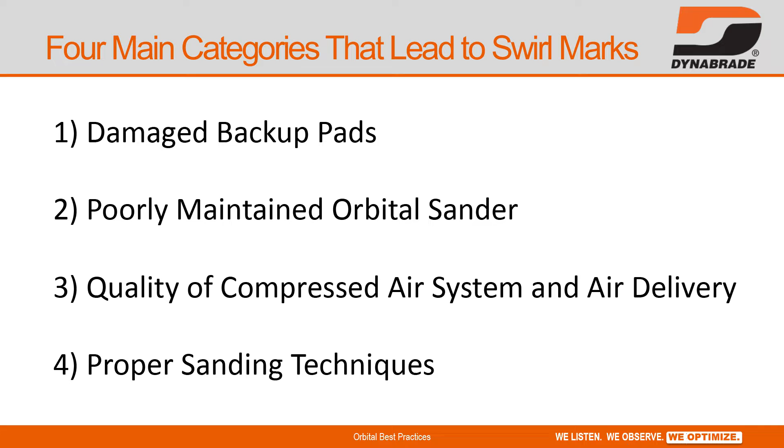Let's start out by talking about backup pads. Oftentimes, backup pads are overlooked as a potential problem when an operator runs into these unwanted swirl marks. However, it's usually one of the common causes.

There is a direct correlation between the backup pad and the finished product. Let's look at taking a backup pad off an orbital sander.

With Dynabrade, it's real easy. All we're going to need is one 26mm wrench. We're going to fit that wrench in between the bottom of the housing and the backup pad.

It will rest on a flat. We'll then turn the pad in a counterclockwise motion, and it will unthread from the tool. Just like that, our backup pad is off the orbital.

When speaking to pad failure, there are two common problems that take place. Number one is the foam breaking apart, and number two is the abrasive stops sticking to the backup pad. When the foam comes apart, it is called a cohesive foam failure.

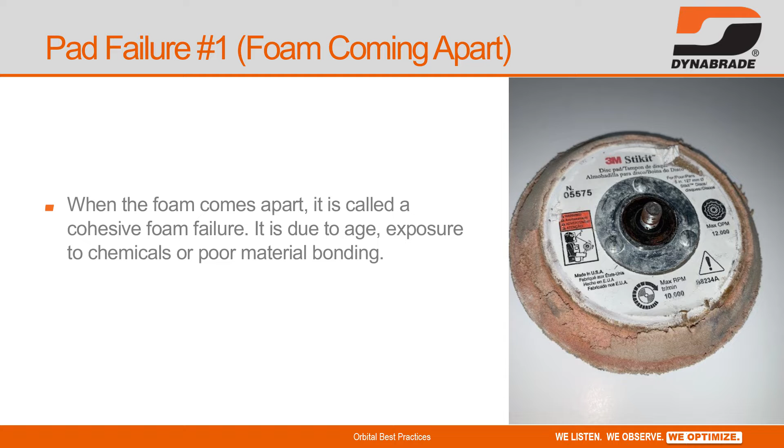It is due to age, exposure to chemicals, or poor material bonding. The following is a good visual representation of this.

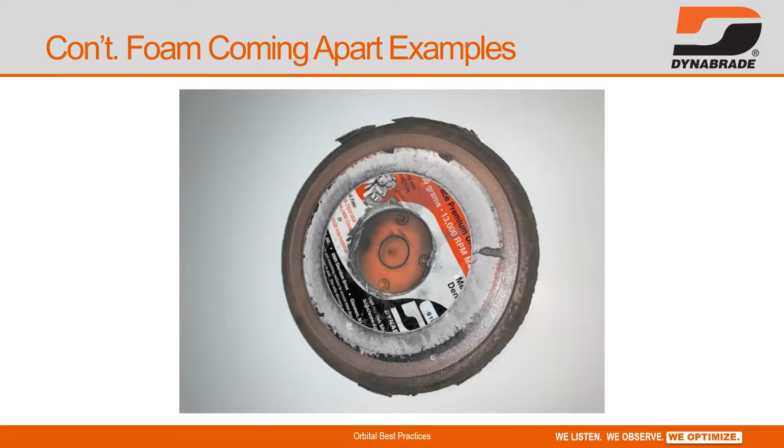When the foam pulls away from the backer, it's called an adhesion bond failure. The foam itself stayed together, but did not adhere to either the interface material or the fiberglass pad backer. This is pictured here.

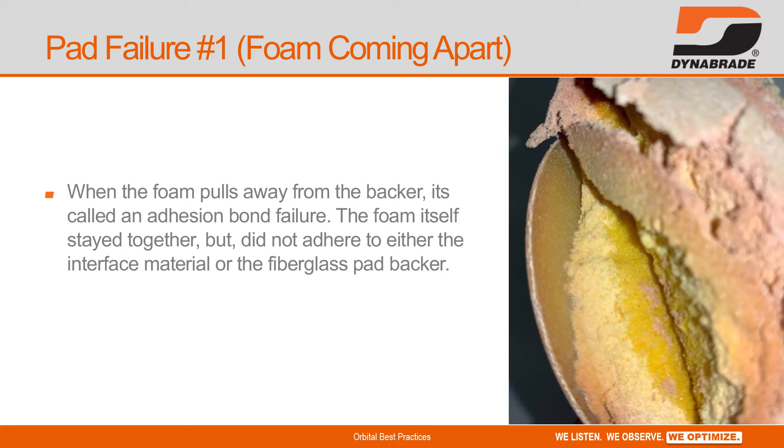The second potential problem we mentioned was the abrasives not sticking to the backup pad. It's usually due to melted hooks from overheating during sanding. If it's PSA or stick-it, there is usually contamination between the pad facing and the abrasive.

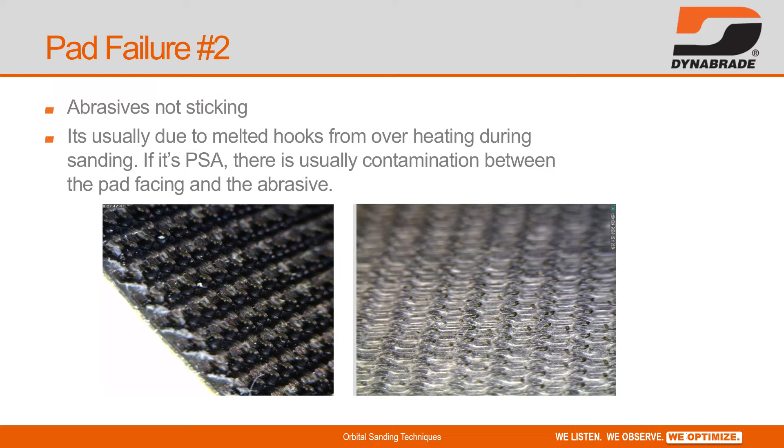Notice the visual here of the melted hooks. This was most likely caused by excessive pressure being exerted during the sanding process and excess heat.

Regardless of which backup pad issue we're dealing with here, the main point is the pad will not be able to sit flat on the work surface, we will not be able to sand evenly, and the end result is going to be surface defects. We're going to see those swirl marks.

On a side note, we need to ensure that our backup pads stay clean. If we are using a PSA or vinyl style backup pad, we need to remove the PSA disc at the end of the workday. We also need to ensure that there is no glue or adhesive left behind.

If anything is visible, we need to remove that. Again, if anything is on the pad, it will not be able to sit flat on the work surface.

If we are dealing with a hook and loop style pad, we need to constantly clean the hook and loop, or the Velcro. We can do this with compressed air by just blowing the pad off.

We should be blowing the face of the pad off routinely through a standard workday. Dynabrade has several options when it comes to pad diameter. We offer orbitals in 3-inch, 3.5-inch, 5-inch, and 6-inch.

One common question we often receive out in the field is, can we take a 5-inch pad and put it on a 6-inch orbital, or a 6-inch pad and put it on a 5-inch orbital? The answer to that is no. The tool will vibrate excessively.

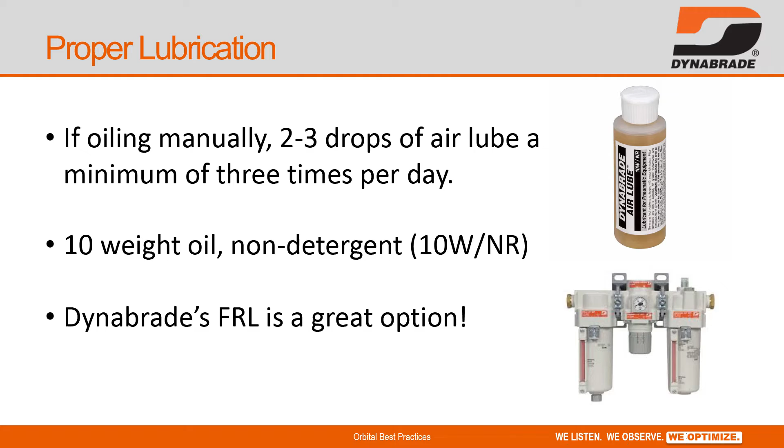Continuing with the idea of properly maintaining our orbital sander, one thing we want to ensure we avoid is not allowing any debris into the air motor of the tool. Here's one thing I constantly see when I'm out in the field.

Okay, what was wrong with what I just did? While the sanding technique was fine, which we'll get to a little later in the video, notice there are other tools that I was not using laying around the work area. With this non-vac tool, I was creating a cloud of debris. That debris was most likely going into the other tools, in the inlet, and actually getting inside the air motor. Any type of debris that gets into that air motor is going to cause premature wear. So we want to avoid doing this.

The other thing I constantly see out in the field is a customer will take a blowgun, one of Dynabrade's inline blowguns, and actually blow air into the inlet of the tool. We never want to clean off the inlet of the tool by blowing excess air into it. Oftentimes this is done with the use of a blowgun, which will force dirt and debris into the tool. Remember, before the tool actually fails, it is going to slow down, and if it's not running to optimal performance, it's going to run slow and leave those swirl marks.

One last thing I'd like to touch on in regards to properly maintaining our orbital sander are the muffler inserts. Dynabrade takes great pride in manufacturing some of the quietest industrial power tools on the market. For this reason, they are all made to spec with muffler inserts. We should never take these muffler inserts out unless we are replacing them.

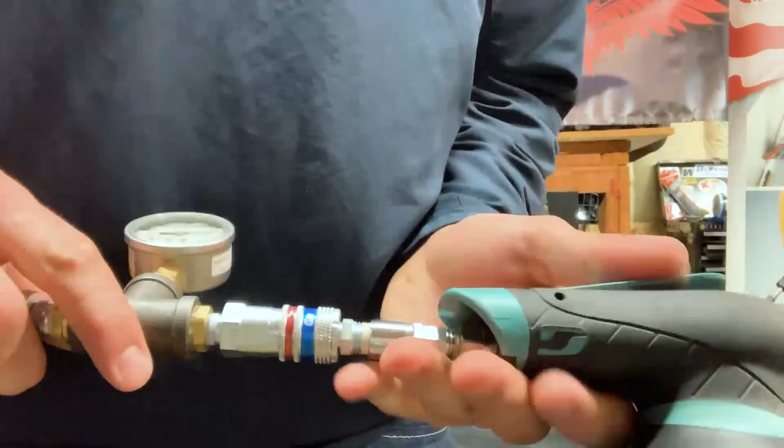Now let's take a moment and focus on air volume. Dynabrade supplies MegaFlow plugs and couplers. There is a substantial difference between these MegaFlow plugs compared to standard industrial fittings. Looking at a standard industrial 1/4 inch fitting, it only allows approximately 25 SCFM into the tool. On the contrary, a Dynabrade 1/4 inch MegaFlow plug allows a full 76 SCFM into the tool. To ensure our air tool is getting adequate volume, we should always stick with the Mega plugs.

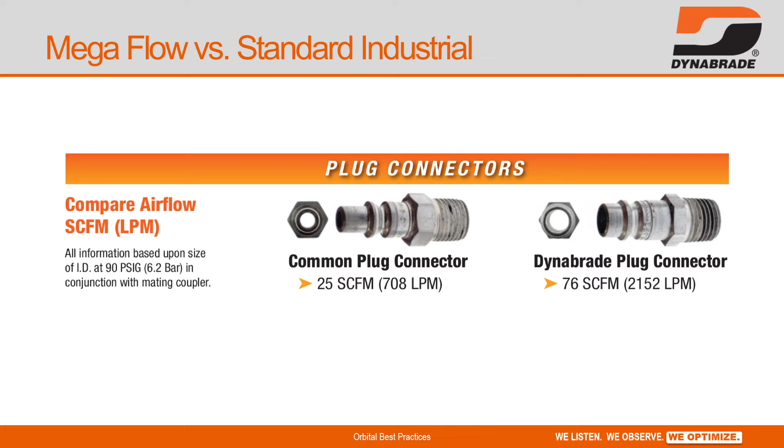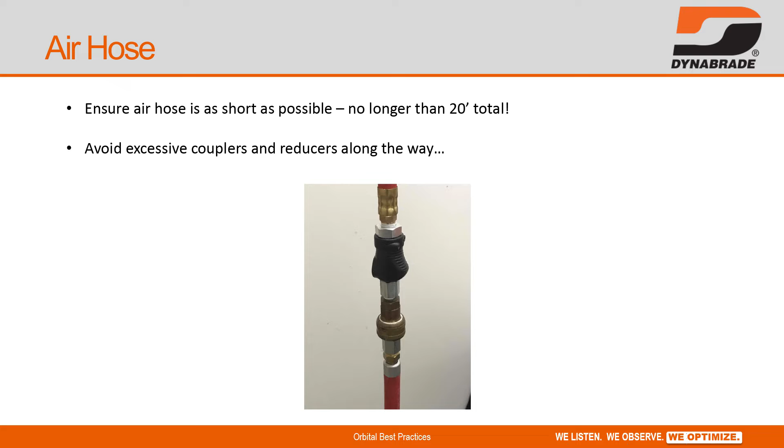Now let's spend some time looking at the air hose. We want to ensure that the air hose is as short as possible within reason, definitely under 20 feet long. Any longer than this is when we begin to reduce the amount of airflow tremendously. We also need to look for any additional couplers or restrictions along the way. Anytime we see one of these reducers, we again are reducing the amount of airflow. Another thing to avoid: both coil hoses and hose reels.

The fourth and final point we want to focus on in regards to getting swirl marks is operator technique. Alright, so sanding technique number one: we always want to start the orbital on the surface and stop off. I'll demonstrate proper technique first.

So the question is, why do we want to start it on the surface and stop off? Well, the answer is very simple. If we get the tool running and then meet it up to the surface, it's likely going to gouge the surface because it's not going to be hitting it in a uniform manner. This, again, is going to lead to swirl marks and defects. The other thing is, if we stop the tool on the surface, as the tool slows down, it's likely going to dig in and gouge the surface. That's exactly what we don't want to do. So again, we want to start the tool on and stop the tool off.

The next sanding technique we want to abide by is we always want to work with the orbital sander horizontal and flat on the work surface. We never want to work up on angle or up on edge. I'll first demonstrate the correct method. Again, starting on, stopping off, but again, we want it flat with the surface.

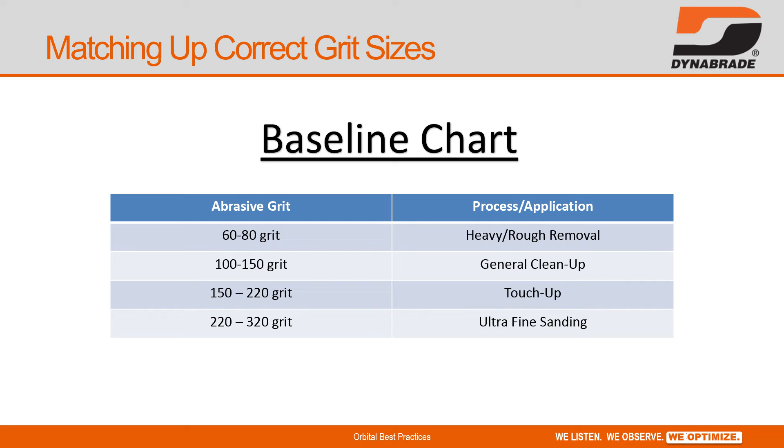On top of this, we want to make sure we match up the correct orbit. Dynabrade offers 3 different orbits: 3/8 orbit, your most aggressive; 3/16 orbit, your general purpose orbit and by far the best seller; and finally our 3/32 orbit, which is for ultra fine sanding. Matching up both the correct grit size and the correct orbit will ensure that we avoid swirl marks and get that desired finish.

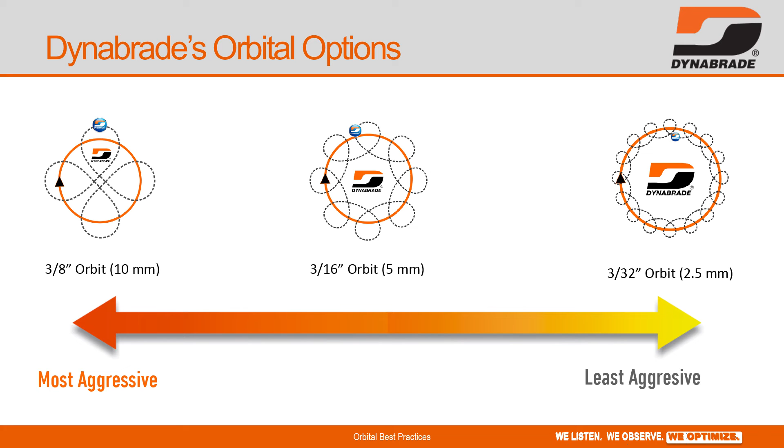The final thing we want to accomplish in this video is to establish a checklist that you, the distributor, can walk into an end user with and actually diagnose some of the potential problems if they're encountering swirl marks. You'll notice each component of this checklist falls within the 4 main categories we've discussed today. Those 4 main categories of why an end user might be getting swirl marks are: 1, problems with the backup pad; 2, properly maintaining the orbital sander; 3, the air delivery system; and 4, proper sanding techniques.

Okay, so let's establish this startup checklist. First, let's examine the orbital sander prior to even plugging any air into it. Is it missing any parts, such as the muffler? What is the condition of the backup pad? Is it damaged? Next, let's check air pressure and air volume. Again, all Dynabrade tools are rated at 90 psi while the tool is running. Also, we recommend running our Mega Flow plugs.

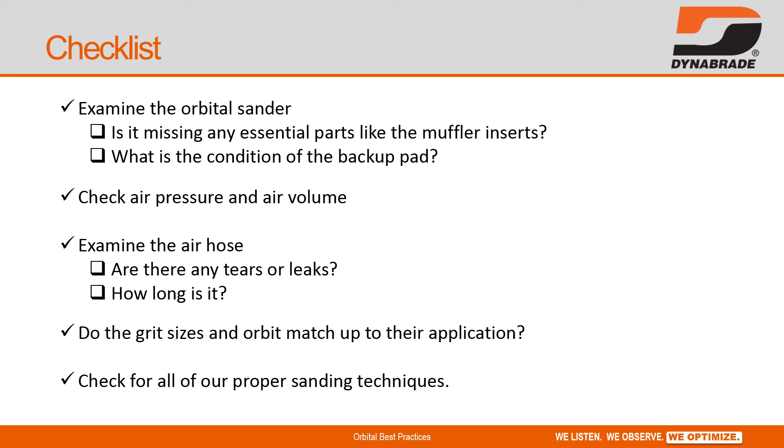Next, let's look at the air hose. Are there any tears or leaks? Again, the air hose should not exceed 20 feet in length. At this point, we are drastically decreasing air delivery. We recommend running Dynabrade's new 5/16 inch gray hose to get adequate airflow to the tool. Next, let's look at the grits the operator is using as well as the orbit on the orbital sander. Let's make sure this is matched up to their process so they get that desired finish. Lastly, let's check for proper sanding techniques as we've discussed in this video.